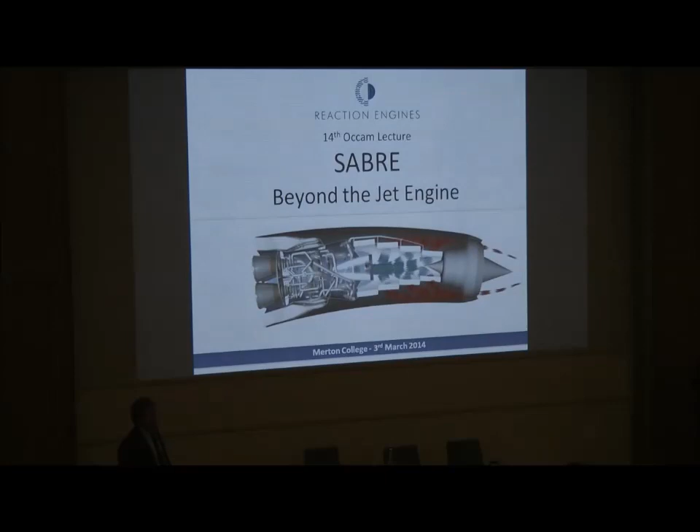One of the things I heard in conversations earlier is that there are a lot of physicists here, so I will pause at some point and talk about entropy. I love to do that because if it's an audience of engineers, they go absolutely pale, and when it's an audience of physicists, they go just a little bit pale.

Looking around this audience, most of you think that access to space is ancient history, but unfortunately it sort of happened mid-career as far as I'm concerned.

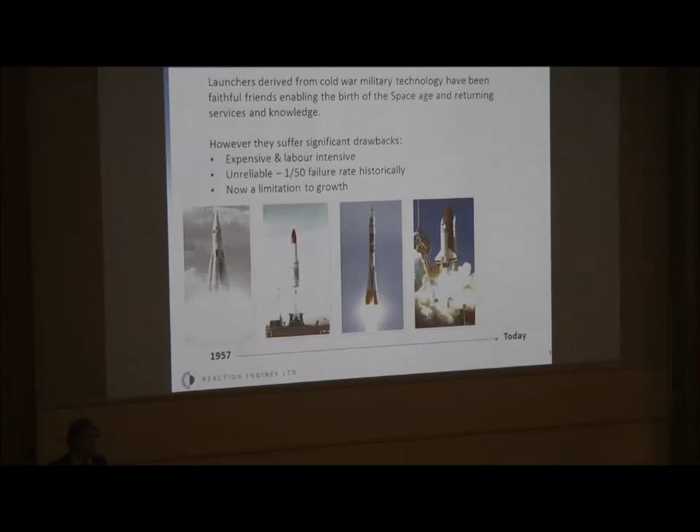The launchers were derived from the sort of Cold War technology that we developed to keep one another at bay, and unfortunately it looks like we still have to do that to some extent.

They've been really faithful friends, and I'll come on to that in a moment with regard to the whole new vista they've opened up in our understanding of the solar system, and the way they've impacted our life on Earth every day. All of you are influenced in ways you probably don't even realise because of access to space.

In many respects, the Russians set the whole thing moving with the launch of Sputnik 1 in 1957. Prior to that, when I was in my teens, we were looking at the Americans for launching something weighing about 18 pounds into orbit. And all of a sudden, in October 1957, the Russians launched something weighing 180 pounds into orbit. Everybody said they must have dropped a decimal place somewhere - it won't be possible. But it was true.

This was originally designed to deliver very large atom bombs onto the West, because the Russians didn't know how to make small atom bombs in those days. But from that, everything has grown.

You can see that that's really the same sort of vehicle that we've got here, with upper stages and so on. This one was Black Arrow, this one was British. We've got a unique record in Britain in that back in 1971, we developed this launch vehicle in the previous decade.

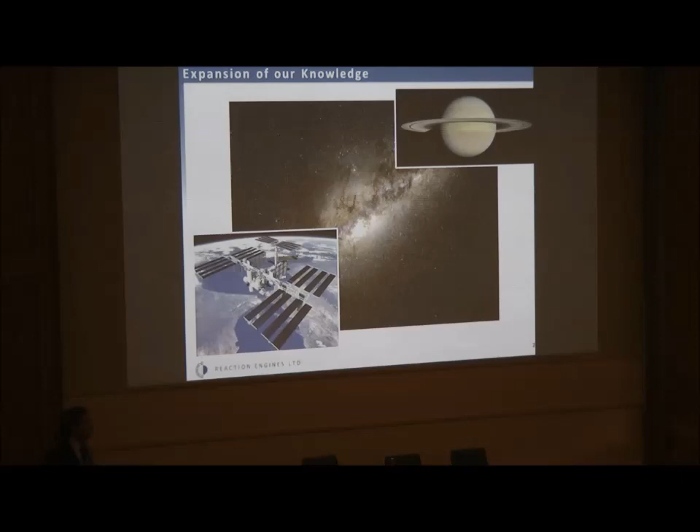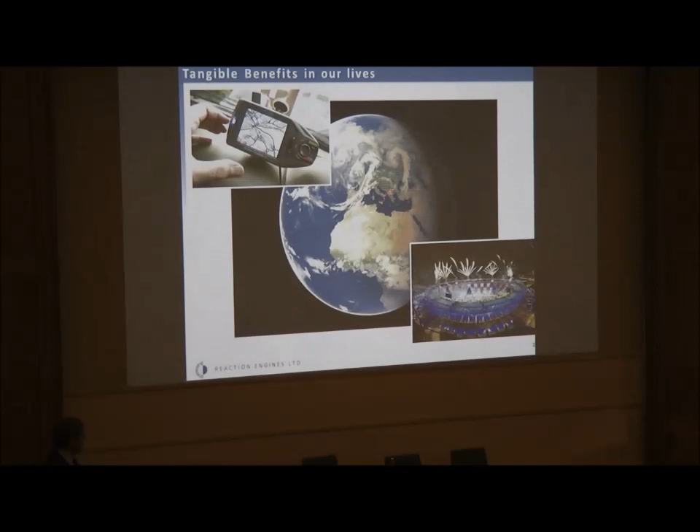And of course, there are other much more tangible benefits in our lives. You can drive into all kinds of rivers and floods with your GPS system, and we can broadcast the Olympic Games all over the world from London. So the world is shrinking, the communities are coming together, and one would hope that sooner or later we'll all learn to realise that this is a really tiny place and that we can't afford to muck about on it the way that we currently do.

The problem with rockets is that they are basically military hardware brought into modern life. A rocket arrives at a launch site as a large airfix kit of parts, which you put together, with a massive number of people. To get a shuttle into the air took about 6,500, at its peak about 10 or 11,000 people, just to put it together and get it into flight. That cost between $500 and $700 million for each launch. With our current Ariane 5, the gem of the European space program, each launch is about $180 million in round numbers.

And of course, that rather limits what you can do in space. As a consequence, there may be 50 launches a year, and maybe in a really, really good year these days, 100 launches a year. At that rate, the diffusion of the human race off the surface that I mentioned is going to be incredibly slow, and we need something better.

Now, in Britain, we've got a rather interesting history. My career began at Rolls-Royce working on Blue Streak. Back in 1969, I was out in Australia looking after a set of engines to go into this vehicle, and witnessed the flight of one of those. I've already said I saw the first flight of Black Arrow. So in the 60s to 70s, I learned quite a lot about rockets.

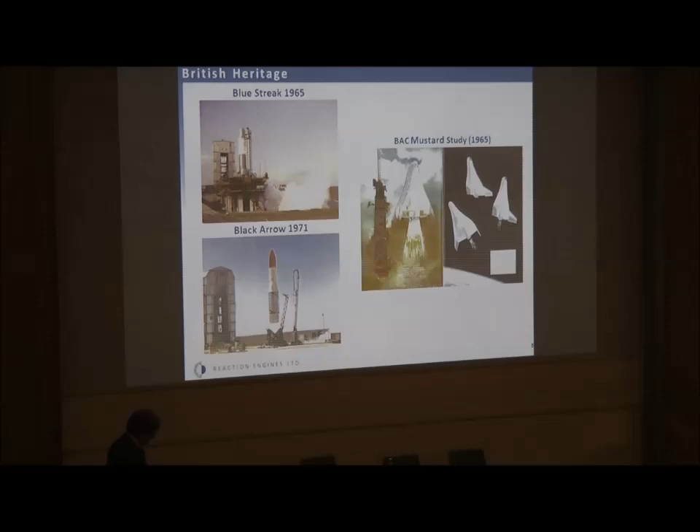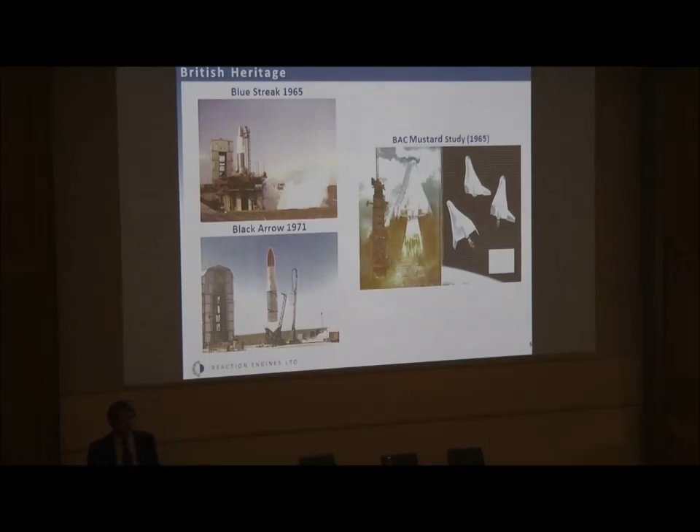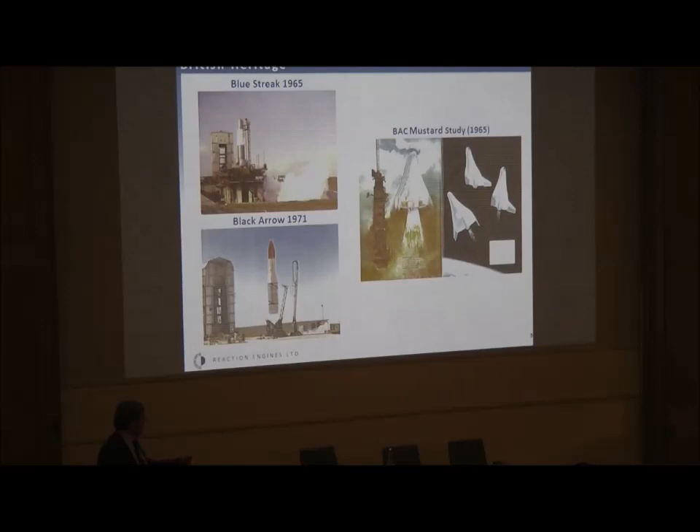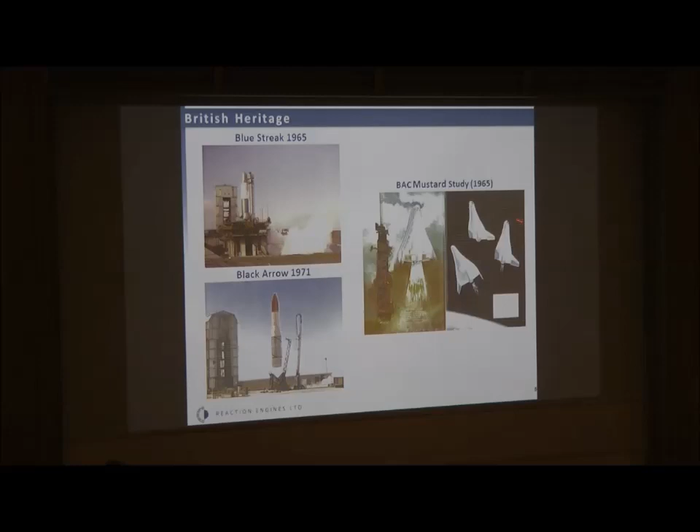But back in the drawing room up at Preston, British Aircraft Corporation was studying something really exciting - a stack of rather similar looking aeroplanes that would lift off as a single unit. At a certain altitude, these would separate, with two stages transferring fuel into the core during the launch, and then this one would go onto orbit, deliver about 5 tons of payload into a low Earth orbit, re-enter, and then fly back. So within a few hours of the launch, you've got 3 separate aeroplanes back at the launch site to put together and do it all again. That would have brought about a major improvement in the way in which we gain access to space - it would have really transformed it.

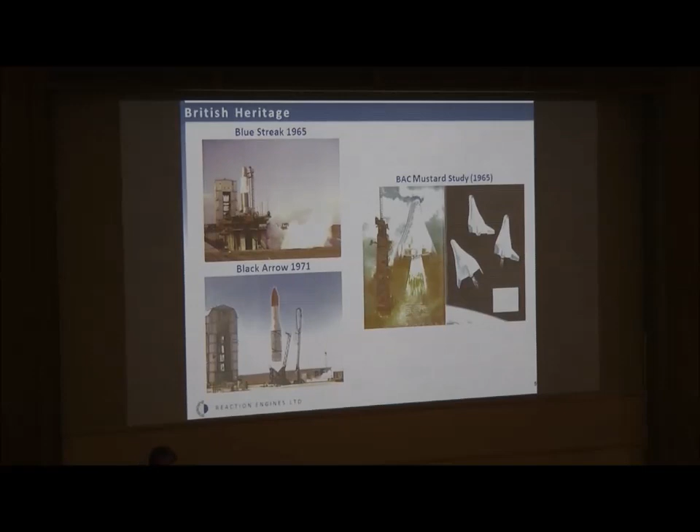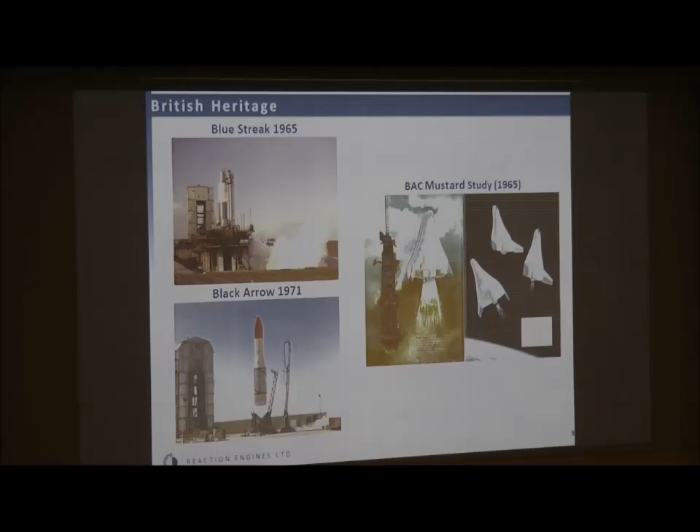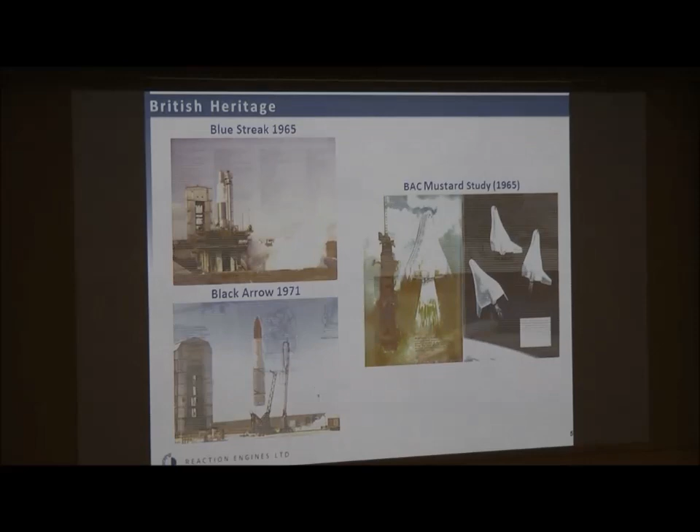But unfortunately, this all arrived at a time when Britain was starting to lose interest in this sort of thing. We'd had the wits scared out of us by World War II, and so in the 1940s and 50s, we put a lot of effort into it. By the 60s, we were starting to face economic realities. Then in the latter part of the 60s, the Wilson government came to power, reviewed all that we were spending on aerospace, and decided that we really couldn't afford to do all that. There's a long story there that I don't have time to go into. But in the 1980s, this came about.

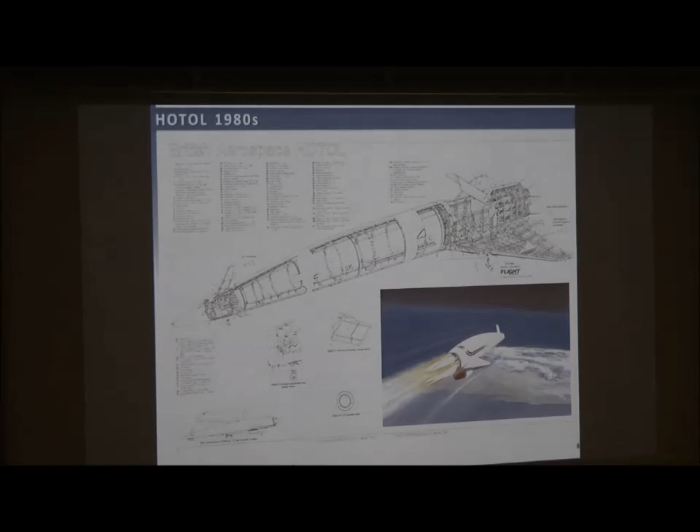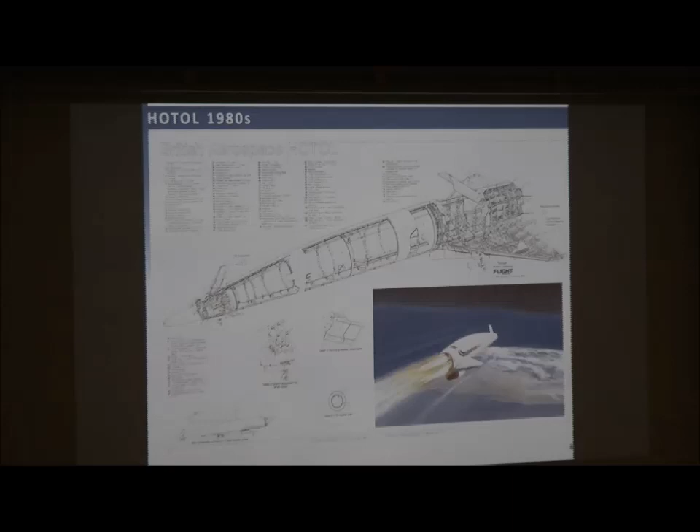Now, Steve mentioned that I spent a few years during the early 70s working for British Aircraft Corporation, working on things that can't go into in much detail, but were very much tied up with national defence. As part of my conditions for working there, I used to have every Friday afternoon with their computer, which had massive capabilities - I think it was an IBM 1160 or something. It had a central processor with 32 kilobytes of core, and we had stacks of card readers and so on.

I was allowed to use that to do whatever I liked on, which was quite an achievement, because the rest of the time I was shut literally behind bars in locked rooms and I couldn't talk about what I was doing. I investigated all kinds of propulsion systems, and all of those studies led me to the conclusion that rockets really were not going to hack it in the long term, and we had to start to do something different.

We had to use the lower atmosphere like a jet aircraft in order to offload the problem of the rocket. Now, a rocket's an exponential device in terms of its weight. When you launch a rocket, the first part of the propellant you burn is putting the energy into the propellant you're going to use later on.

There's a famous equation called Tsiolkovsky's equation. Basically, it's an exponential relationship between the starting weight and the finishing weight of the rocket and the exhaust velocity of the engines. Rockets cannot quite hack it because we can't make the structures light enough. They get very, very close, but they can't quite get there.

So what we want to do is use the atmosphere in some sort of jet engine, air-breathing engine, whatever, to try to help the rocket get over that first little bit.

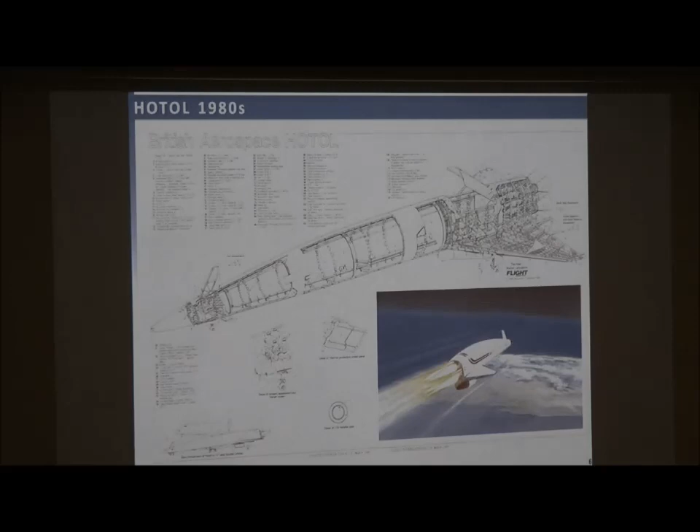So with Skylon, we solved that problem by chopping up the hydrogen tank and distributing it in front of the vehicle and behind, putting the engines on the wings instead of the base, and moving the centre of gravity to somewhere near the middle of the aircraft.

And of course it took on this long pointy shape, and most of you here wouldn't remember the centrepiece sculpture from the Festival of Britain in 1951, which was called the Skylon, hence its name.

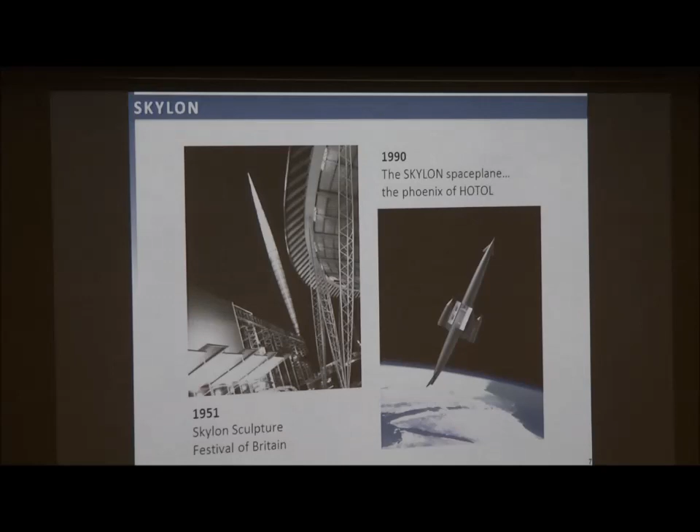Skylon then is a space plane. This is what it's designed to operate like. Payload installed in a hangar, wheeled out, a conventional towing tractor on a runway. The engines start in air-breathing mode and accelerate to a point where it transitions to rocket.

Once it gets into orbit, small engines in the rear of the vehicle actually do the orbit insertion. It can deploy the payload, in this case an upper stage carrying a satellite. It then re-enters, at quite high altitude, but I'll come to this later, and then lands.

So that's just a quick view. We'll come to this in more detail, but that gives you a quick scenario. Once it's landed and turned around, it can do it again. No pilot—it's completely automatic, like any rocket.

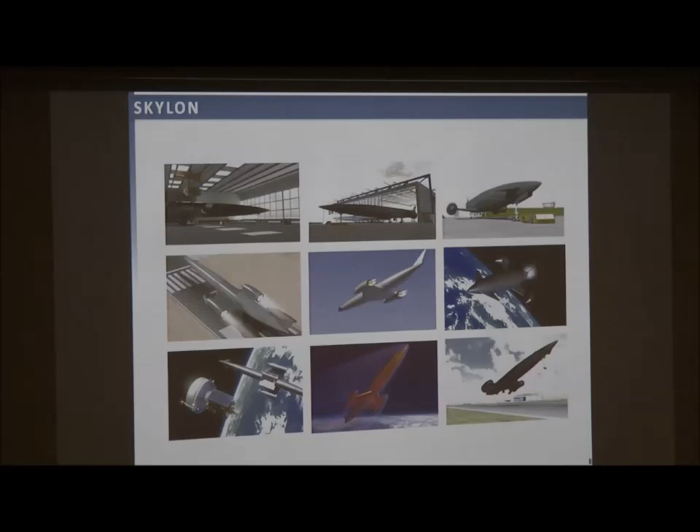There are good reasons for that. It saves weight, saves costs, and also there is no power at landing. It's what we call a dead stick landing, so it's gliding in to do its landing.

What makes all that possible is the Sabre engine. So let's have a quick look at the anatomy of a Sabre engine. It's a combination of rocket engines and a jet engine in effect. Here's the inlet to the jet engine. What enables that to be possible is the following.

An ordinary jet engine is fine until you get to around Mach 2.7, at which point, as you decelerate the air to go into the engine, the kinetic energy gets turned into heat and the air temperature goes up. Therefore the compression work is increasing, and also the temperature is increasing, so you run into the limit of what materials you have to actually pull this trick off.

But the great thing about liquid hydrogen, which is the main fuel I've been talking about, is that first of all it goes into the tanks at around minus 250 degrees centigrade, and secondly it's got 3.5 times the specific heat of water. So as a heat sink, it's a tremendous boon to have on a vehicle.

And we can effectively use the liquid hydrogen to cool the air in this heat exchanger. So the air comes in at 1,000 degrees centigrade here when it's decelerated from Mach 5, passes through this heat exchanger, and in 1/100th of a second the air's down to minus 140 from 1,000 degrees C.

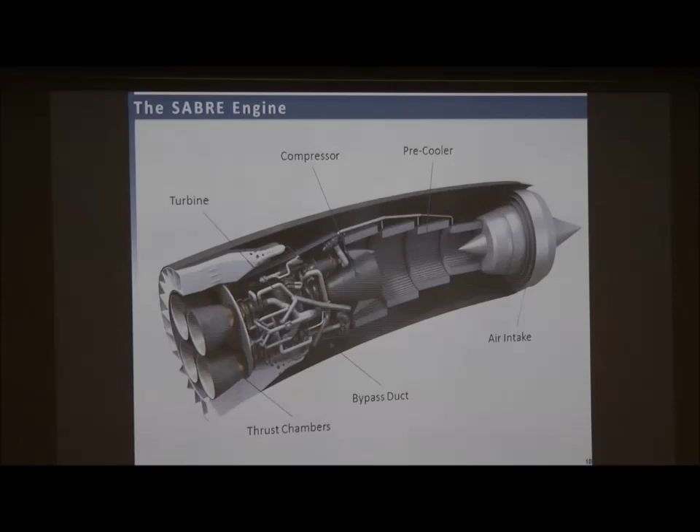So this is the actual engine cycle we're talking about. Here we've got an air intake. The air's coming in at Mach 5, decelerating, getting hot, and we then cool it so it can be compressed and delivered to a combustion chamber and something we call a pre-burner. This is the hot end of a thermodynamic cycle. The fuel, the liquid hydrogen, acts as the cold end of the thermodynamic cycle. The vaporized hydrogen drives these two turbines, and the fuel supply arrives at the combustion chamber, with hot gas going down to the main combustion chamber.

Let me just see if I can backtrack that a little bit so that we can run through it again. Okay, so that's the air cycle again.

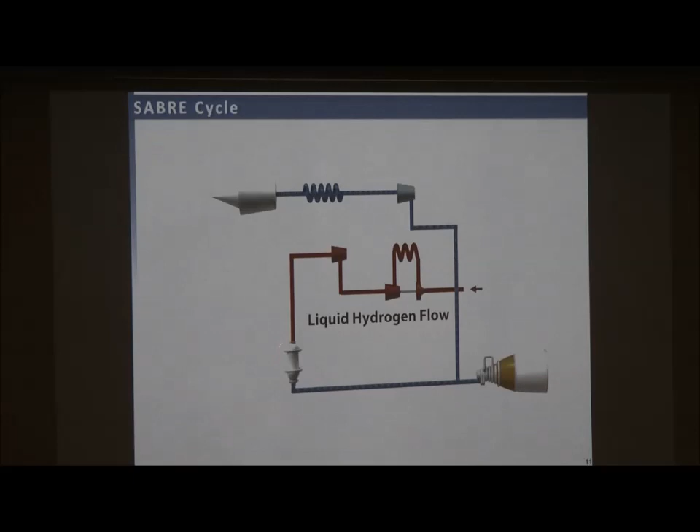And in a moment the hydrogen will come in, so I can just go through that bit again. Here's the hydrogen pump, cold source, a couple of turbines, and that meets up with the air, and hot gas then goes to the combustion chamber.

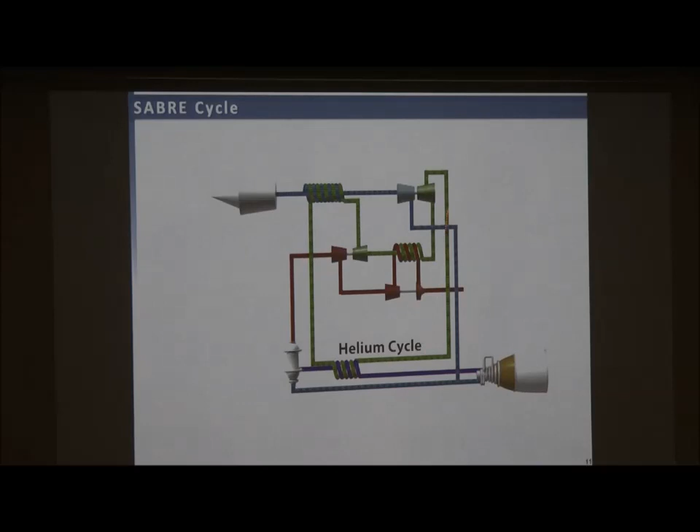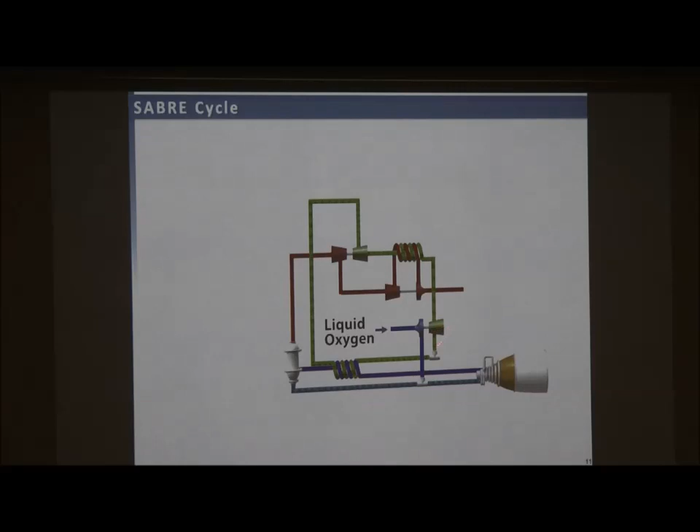Now in between this sink and this source, we put a helium circuit like so. It's heated by the air at Mach 5, we top it up a little bit here, it drives the turbine, we cool it, compress it, and so on. Then when we get to rocket operation, we simply switch it through the turbine that drives a liquid oxygen supply from the vehicle, saving a lot of weight. And then we can completely ascend into orbit.

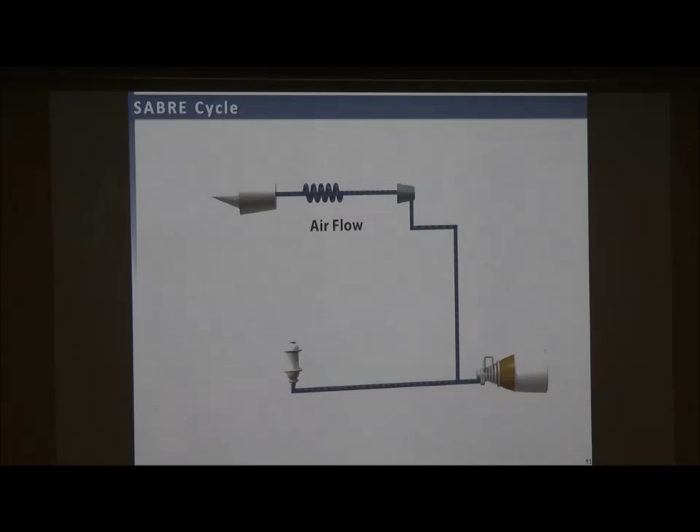Now, this heat exchanger here is actually a phenomenal piece of engineering, and this is what it takes to make one like that. So we start off with a lot of tubes which are about 1 millimetre diameter, and they have a wall thickness when we get them of about 40 microns. Now that's quite thick — the final heat exchanger walls are down to about 20 microns.

And those tubes are going to contain helium at 200 atmospheres. So what we do is assemble a bunch of tubes like that by brazing them into a series of headers and form a modular heat exchanger like this. Here you can see a series of heat exchanger modules about to be made into this structure, and here a particular module about to go into the vacuum brazing furnace to finish up something like this. Each one of those modules is about £100,000 worth of engineering, and in this particular heat exchanger, which is a demonstration, there are about 21 of those modules. So I'm sure you can do the sums on that yourself.

The tubing at the present time costs us about £17 a metre. It's made out of Inconel 718. In a real engine, there are 2,000 kilometres of tubing in each heat exchanger. So this is really impressively expensive engineering, reassuringly expensive indeed.

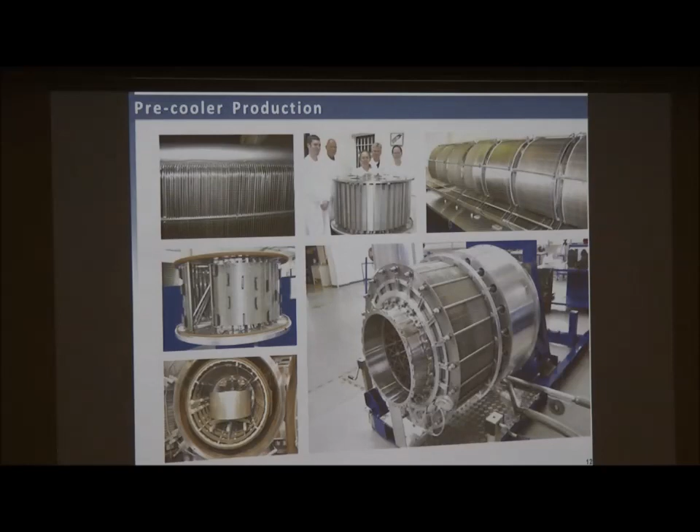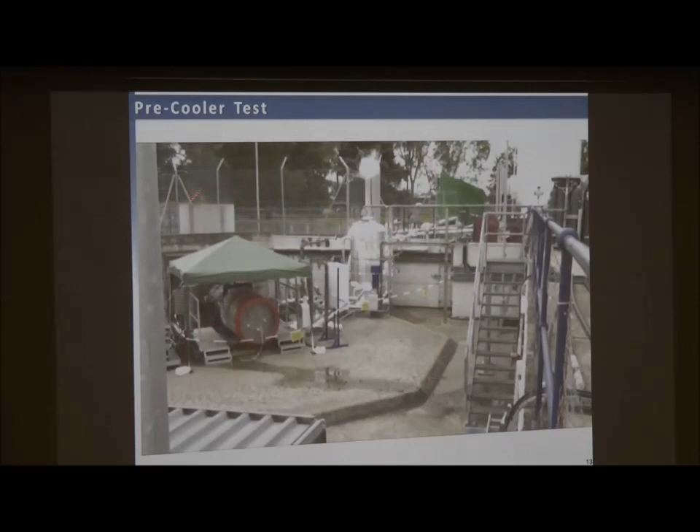We put one of those together and then we managed to get it on test. So what we do on test is that here we have a Viper jet engine and a silencer, in case we disturb Steve Cowley's physicist working on fusion. And here we have a boiler in which we transfer approximately a couple of tons of liquid nitrogen, and that acts as our source of cold. This circulator here circulates high pressure helium out to this experimental heat exchanger and then brings it back. We use the nitrogen to cool it.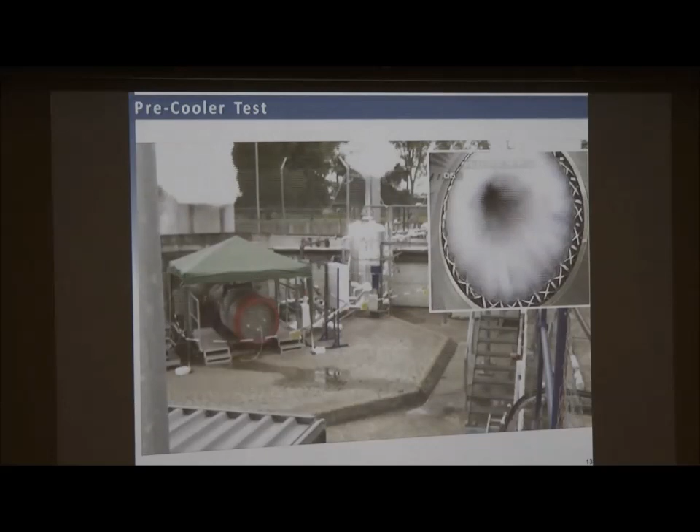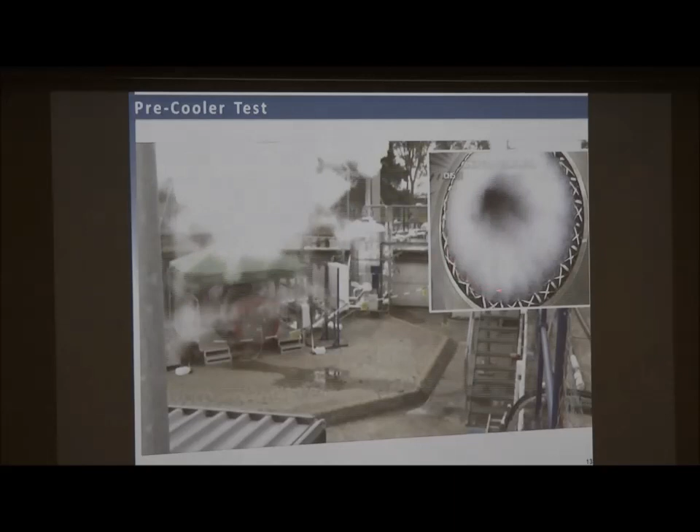And if you look through the cameras in here, this is what you see. What you're seeing there is the very, very cold air at minus 150 degrees C, and it is the heat exchanger sandwiched between two dummy sections, so that ordinary moist air gets drawn in, and you can see the cloud bank that forms when the air with ordinary moisture meets this extremely cold flow.

Now, of course, we have to arrange it so that the very, very cold air doesn't freeze and block up the pre-cooler. If you don't do something about that, it takes about 5 seconds, give or take a second, to block a heat exchanger completely solid. And I'm afraid I can't tell you how we do that. That's one of the sort of secrets that we keep very, very close to our chest. But this is what we've actually managed to achieve.

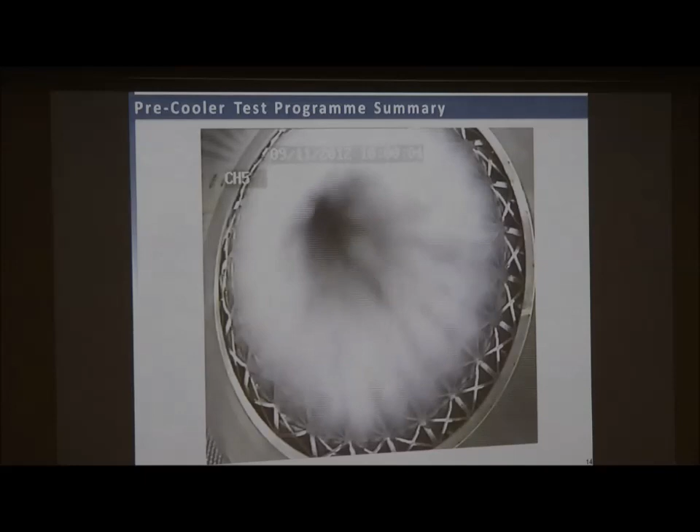So back in 2012, since then we've managed over 600 tests, 300 at cryogenic conditions. Minus 150 degrees C is our lowest. Now, unfortunately, we didn't optimize the frost control system quite right, and so we can only operate with our present system at about minus 120 degrees C in a steady state condition.

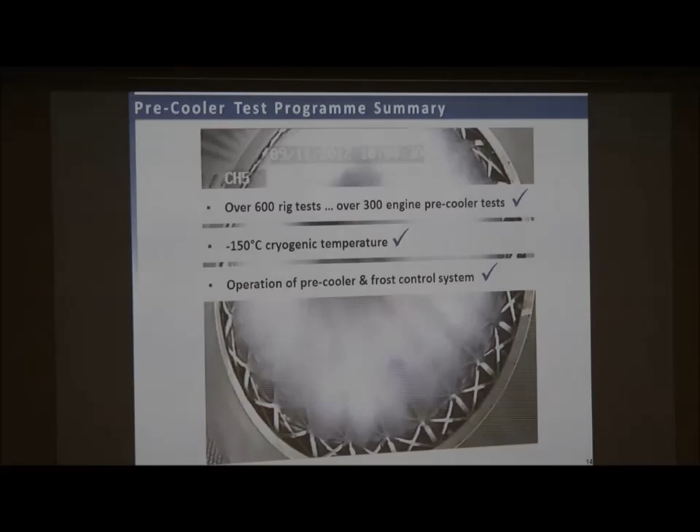We've demonstrated the frost control system, and we've demonstrated the cryogenic cooling. The most important part is that this heat exchanger is flow stable. It wasn't clear that that was going to be the case. Of course, it operates in a fluid dynamic regime, which we call transitional, between turbulent and laminar, whatever that means in a heat exchanger at this time.

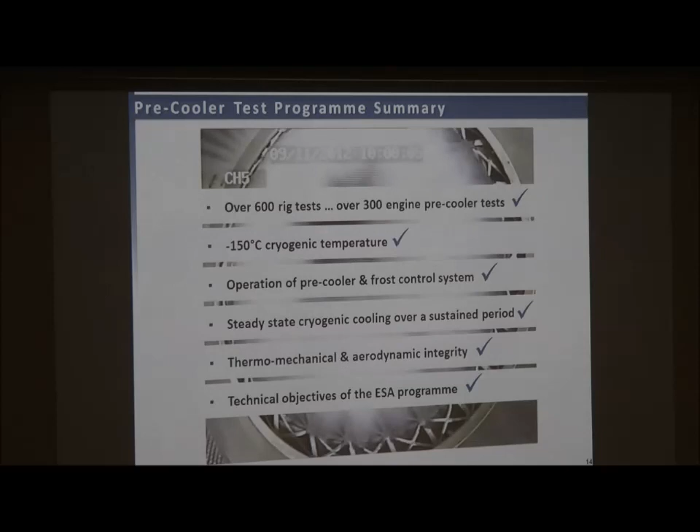And then also we've demonstrated that its thermal and mechanical characteristics are precisely what we need. It's extremely robust, despite the fact it has this extremely thin wall tubing. This has shown that we can take it up and down from our assembly area, and indeed in 2012 we carted the whole thing off to Farnborough and put it on display, much to the chagrin of some of my colleagues. And the most important thing is that this is partly funded by the European Space Agency, and we've met all of the objectives of their programme.

Now, obviously, to bring an engine like this about, there are lots of other technologies. So back in 2008, we demonstrated the properties of a contra-rotating turbine. Heat transfer in the combustion system, a very, very important aspect. We've worked with DLR in Germany and also Astrium in Germany to do that. University of Bristol have done a lot of nozzle work. I'll come back to this one in a little while.

Air intake models we've tested, and conditions of very high pressure in a so-called Ludwig tube configuration, and other types of heat exchangers. We've also done some clever nozzle work, and I'll come to that in a moment, and of course a whole series of heat exchanger stuff, starting back in 1996 at the University of Bristol, when we first demonstrated that we could achieve over 1 gigawatt per cubic metre in terms of heat transfer.

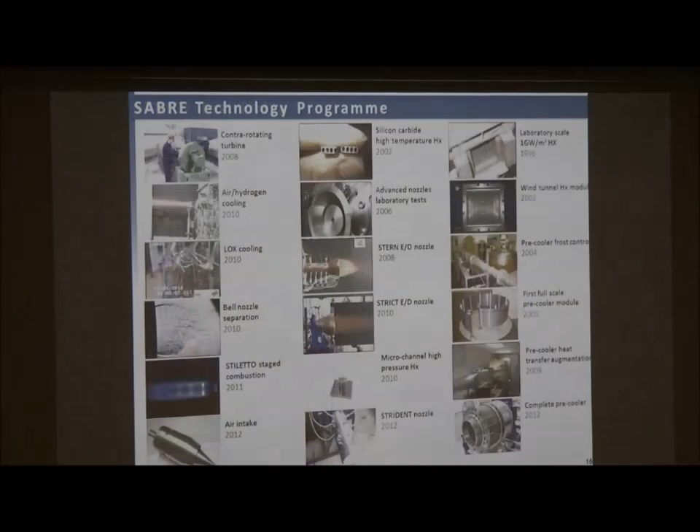Now, one of the problems with a rocket engine that's going to go from sea level to vacuum is that it has to have an area ratio, area of the exit divided by the area of the throat, if it's going to achieve a high exhaust velocity in vacuum. And I've already alluded to the Tsiolkovsky equation, which says that the exhaust velocity of the engine is extremely important. And so we need area ratios of about 120. But the difficulty there is that the flow separates at sea level, and sometimes it can separate unstably. So we did a lot of work with this type of engine, which is known as an expansion deflection nozzle.

So instead of a simple orifice for a throat, this actually has an annulus slot, and the flow comes out as a very thin jet, an annulus stuck to the wall, and operates very stably at sea level. As the engine goes up in altitude, the core of that annulus fills in.

Until at some particular altitude the core is running solid, and the engine is then unaffected further by atmospheric pressure, except that you lose the pressure that's retarding it over the base, so the performance increases like a normal rocket engine from that point forward.

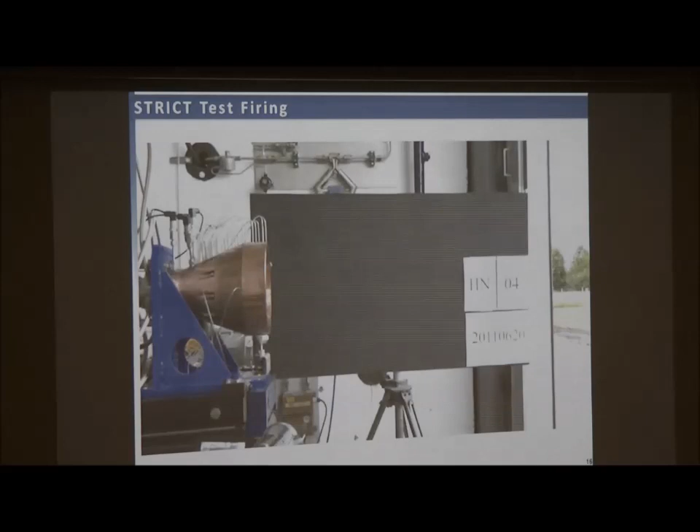Now, there have been a very large number of different Sabre variants, and back in the HOTOL days, there were some conceptual studies. I've already shown you an image of HOTOL, which embodied the Rolls-Royce RB545, a rather primitive version of these cycles. There have been various variants since, and the one I'm telling you about tonight is the Sabre 3 variant, the one we've got out in the public domain.

But what I can tell you is that for the last 3 years we've been working on the Sabre 4 variant of this engine. The main characteristic is that during the air-breathing ascent, we've actually managed to halve the fuel consumption. So the Sabre 4 opens up performance possibilities that even I, at the start of this project, never thought possible. A vehicle could take off from some airfield in Britain, having had its payload installed, fly down to an equatorial site, be filled with liquid hydrogen and liquid oxygen again, and then go off to orbit and do its job. So the capabilities of a Sabre 4 engine are really quite extraordinary.

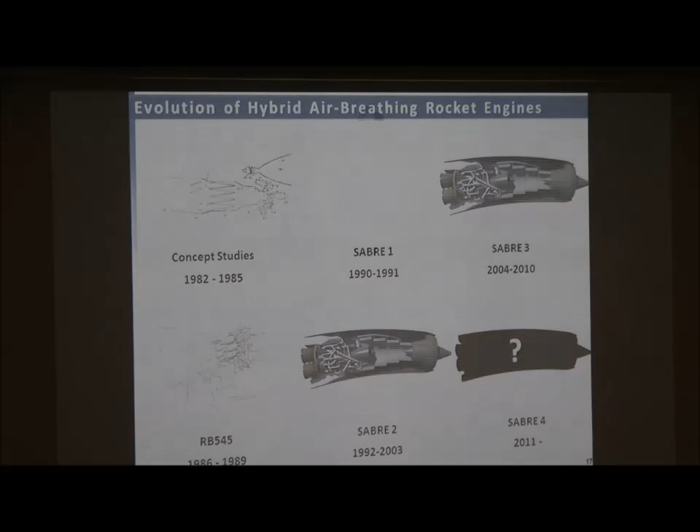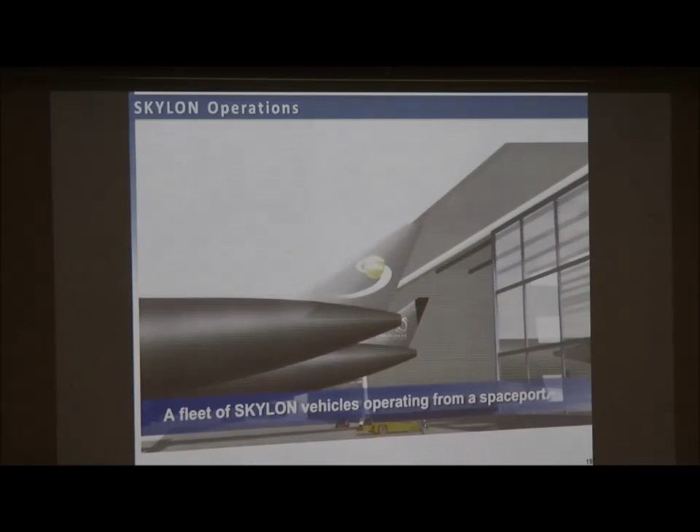I want to say something about Skylon and some of the other possibilities that these engines now enable. Imagine you're somewhere down near the equator, on a launch site there, and there are a whole host of competing operators, Easy Space, Johnson Space, and so on. One of those operators will be in shared facilities.

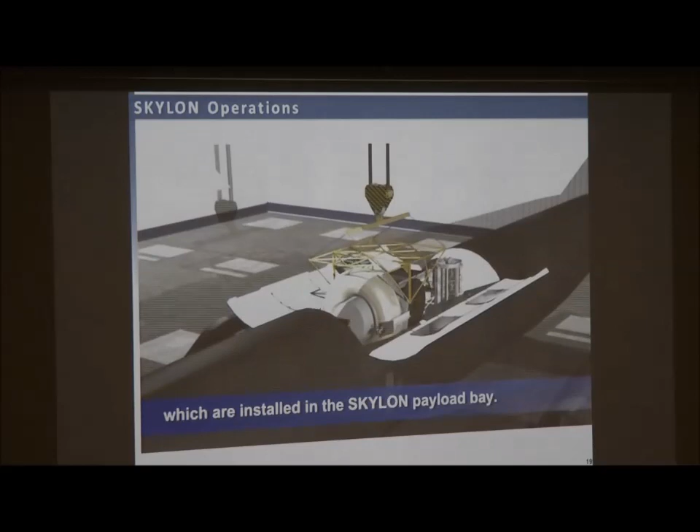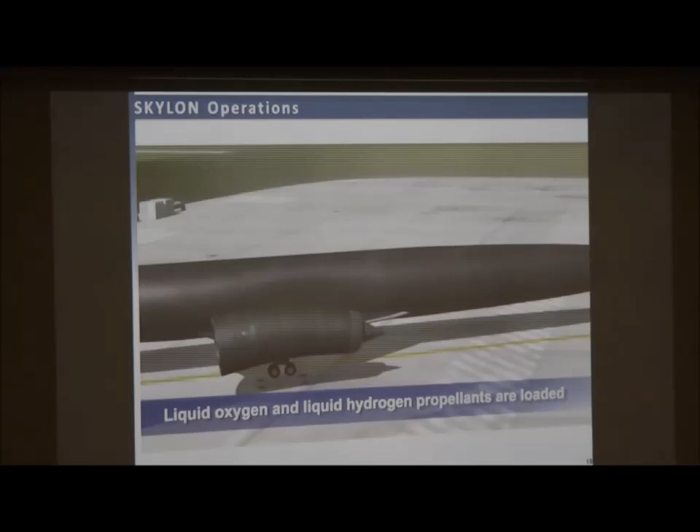The upper stage that you saw earlier, with its payload, is installed into the payload bay, and then the vehicle is taken by its towing tractor out onto the runway. At this point it's empty, and of course there's no pilot, as I've already alluded to. On the head of the runway, automatic systems fill the vehicle with liquid hydrogen, liquid oxygen, helium, and inert all the inner spaces with nitrogen.

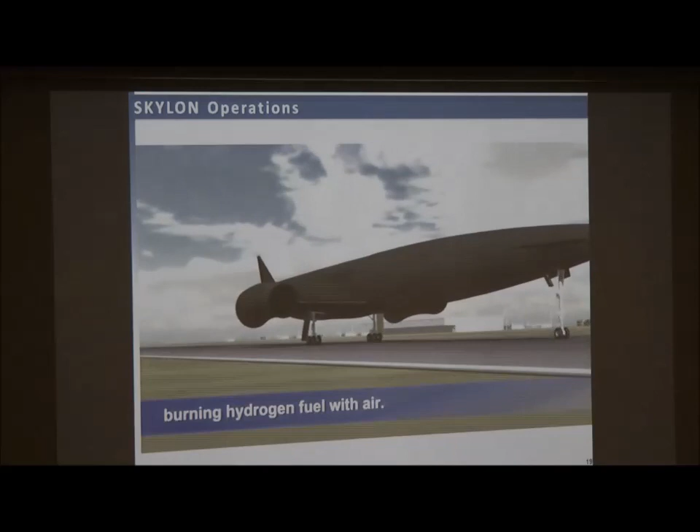And then the vehicle starts up in jet engine mode, effectively, and that accelerates it from the runway up to a speed of about Mach 5 at 26 kilometers. The heat exchangers are operating all the way through this.

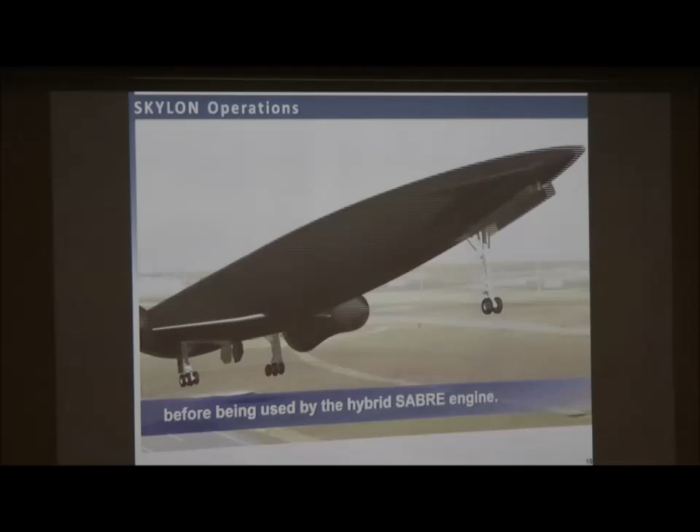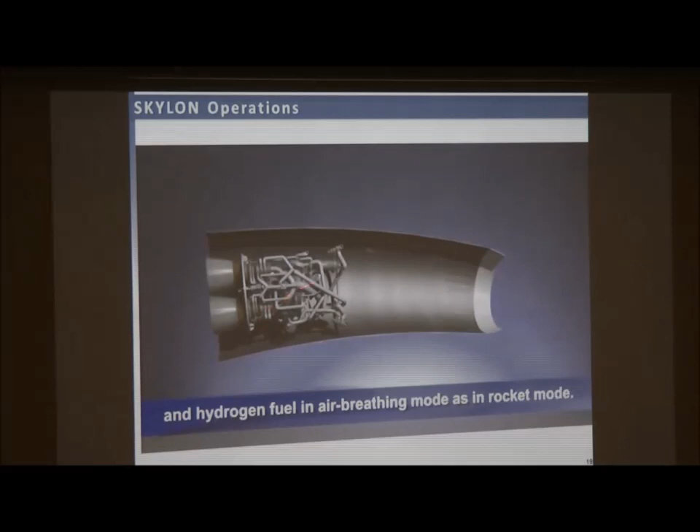So there has to be that pre-burner in there which provides the heat while the incoming air is not hot enough. So just to recap then, it's a collection of rocket engines, combustion systems, the bit that is the compressor for the jet engine, and then this all-important pre-cooler.

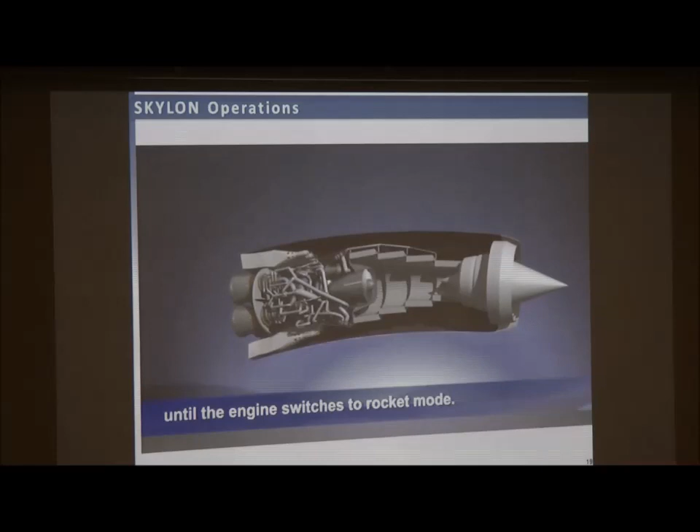That is the key technology that this engine has. There's also a bypass system and bypass burners. I've not got too much time to go into that at the moment. And then the propellant systems, the liquid oxygen, the blue bits, and the liquid hydrogen.

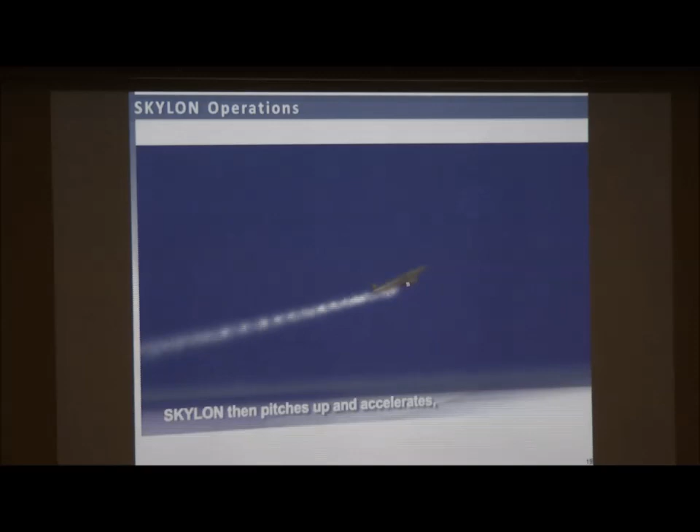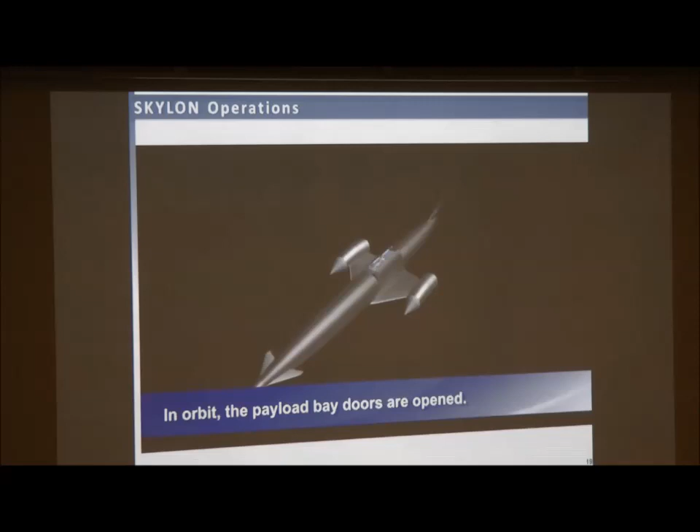So here the vehicle has transitioned to rocket mode, and that pushes it to a transfer orbit, and then you'll see that the orbital maneuvering engines here are circularizing it in orbit. Once you're in orbit, you open the payload bay doors and then magically throw out a space telescope, which I must get somebody to amend this video sometime.

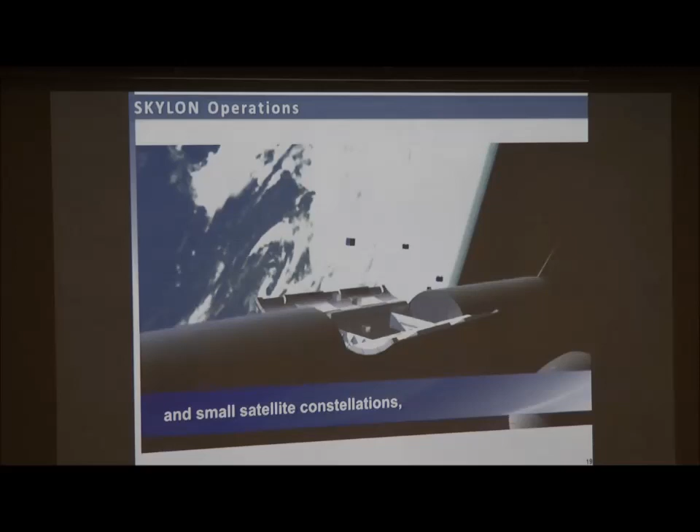But this is intended to show you the range of payloads, including CubeSats, that this vehicle could deploy, with a little bit of artistic license there.

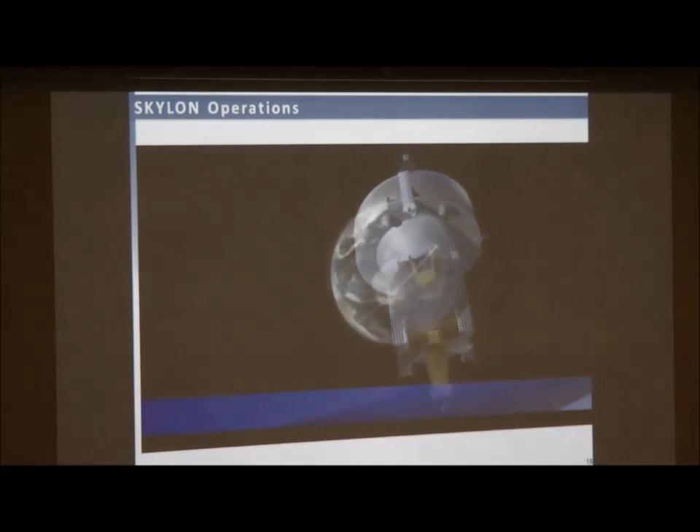So now, magically, we've got the upper stage and the ComSat back. The upper stage then puts the ComSat into its transfer orbit, but the stage doesn't circularize. It deploys the spacecraft and lets it do the circularization burn.

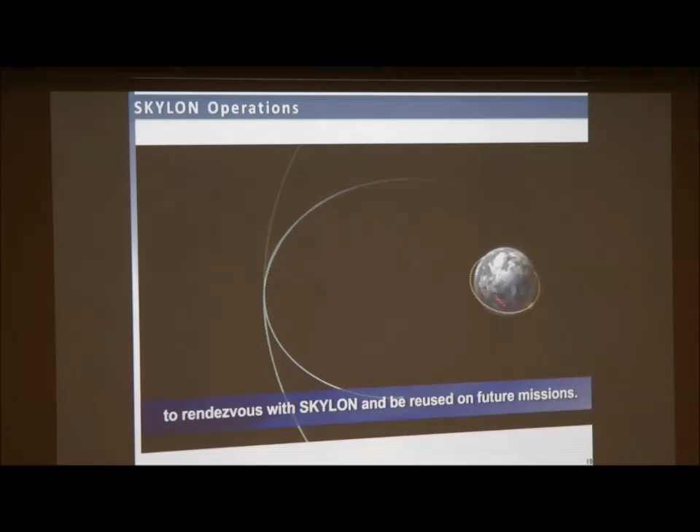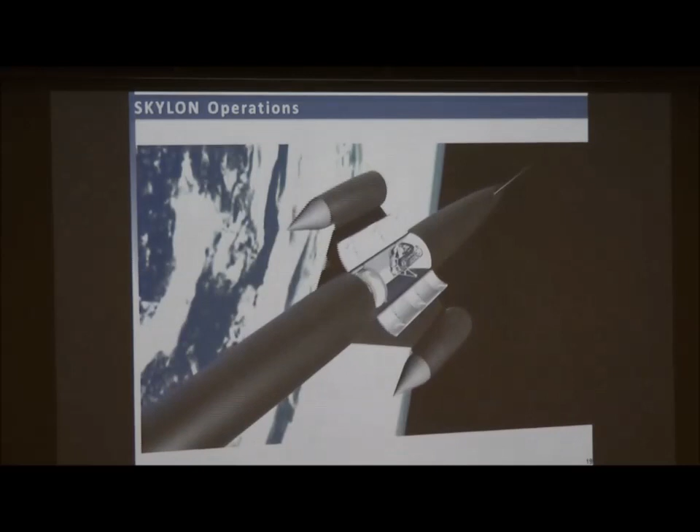And the upper stage therefore remains in an elliptical orbit, which, from a 300-kilometer base orbit, turns out to be in a 7-to-1 resonance. So Skylon orbits 7 times, and if by magic the stage reappears next to Skylon on Skylon's 7th orbit, a gadget captures it, puts it back into the payload bay, and returns the whole thing back to Earth.

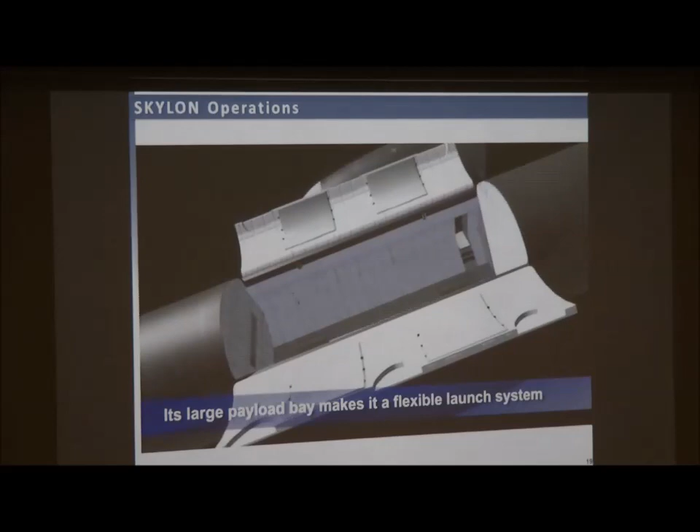So once you've done that, you can return. This is going to show you a little bit more. We chose the payload bay so it could do a lot of things.

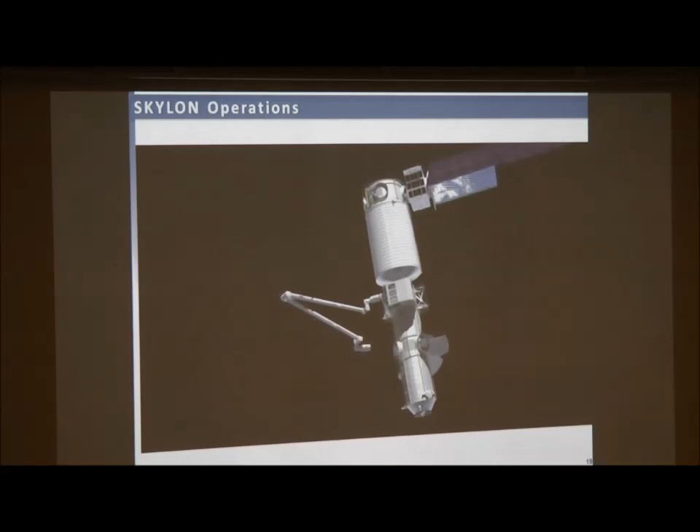This is a passenger logistics module that can carry between 20 and 30 people up to the International Space Station. This would extend the life of the International Space Station, and since it's a $100 billion investment, I think that would be quite important to do.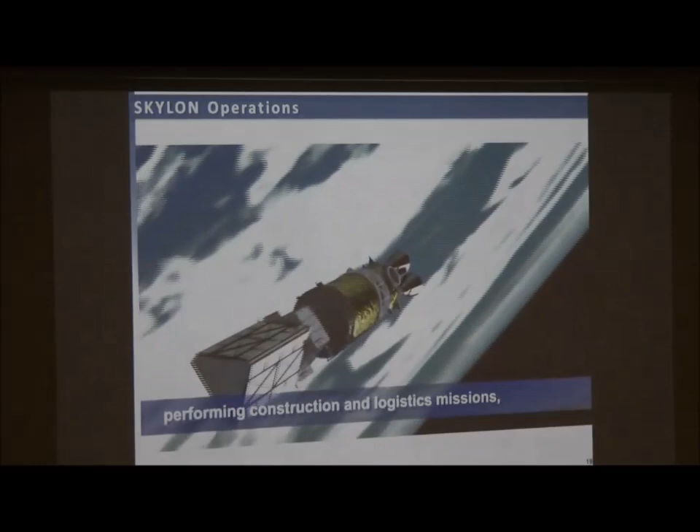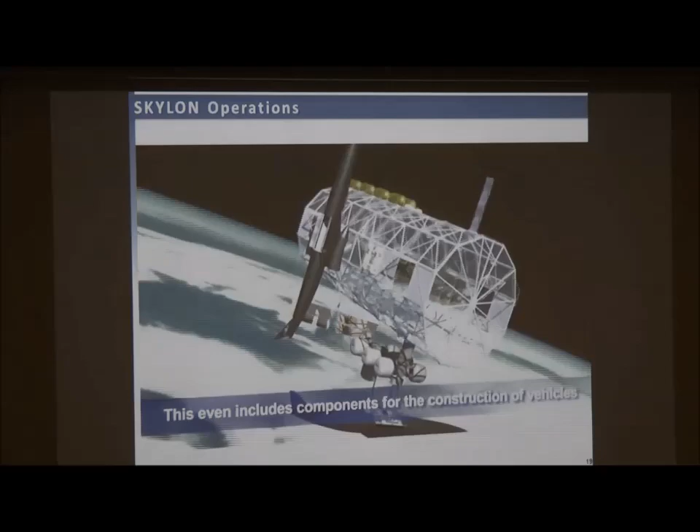We can also set up small laboratories in space and transport nodes. There will be some vehicles which Skylon can carry into orbit, which then stay in orbit forever, and Skylon simply carries the propellants up to them. A stage like this could service 15 tons to geostationary orbit, but also out to the moon, setting up possibilities there. We could even put very large assembly facilities in orbit to build vehicles for reaching out to Mars, and that's one of the most exciting things.

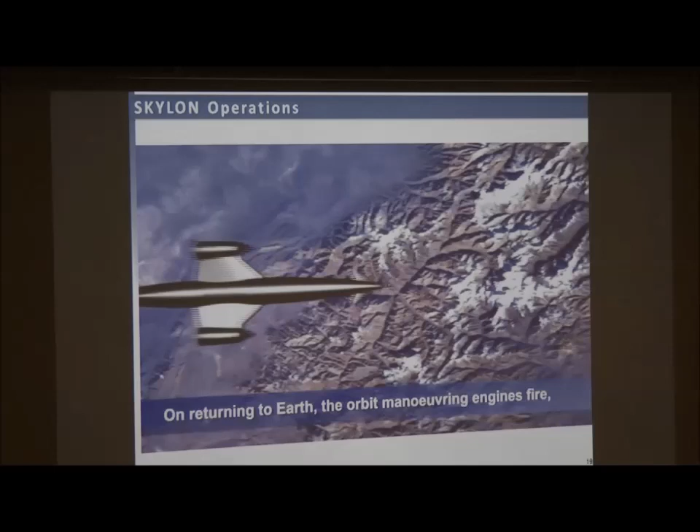We did a very comprehensive study of that called Project Troy, because a young lady named Helen at Reaction Engines sort of suggested we should do it. And there's the re-entry and the landing that I mentioned.

On the vehicle, although we're an engine company, we have done a certain amount of work - trajectory modeling, avionics, and re-entry modeling. Now, any of you who know anything about re-entry vehicles will say that shape will never re-enter, it's all pointy with bits sticking out from behind the bow shock.

The Germans at DLR said this - they said we don't believe that can be re-entered. We've done quite a lot of analysis of that, and we're convinced that it would. But DLR have got one of the best codes going, a thing called TAU, to do that sort of modeling. It usually takes about 3 weeks to do a computation, so we sprang them about 50,000 euros and they went off to model it.

We've also done wind tunnel testing - this is Kingston University. One of the most interesting things that determines this configuration is the fact that you might have to land it in a gliding configuration on a runway with a 30-knot crosswind. So the subsonic testing of this at Kingston was actually quite important.

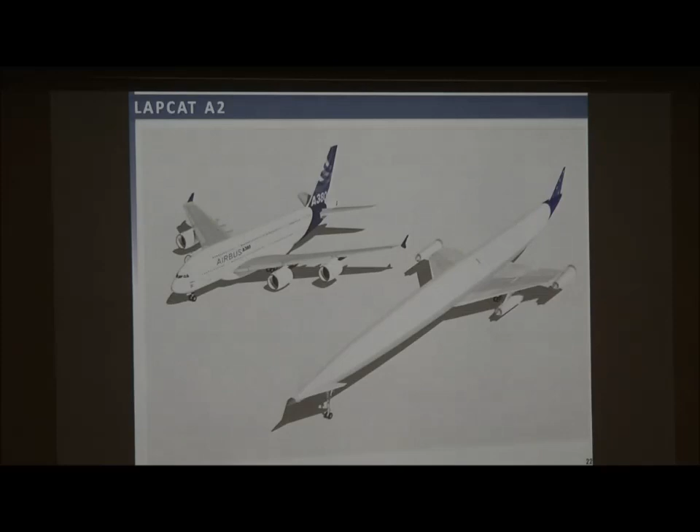But some of this, of course, spins off into other areas. One of the important studies that we did was this vehicle, the A2, which is a passenger-carrying aircraft that can carry 300 passengers from Brussels to Australia in 4 hours and 40 minutes.

So it takes off from Brussels, can fly subsonically out over populated areas, then go out into the North Sea with right hand down a bit, across and through the Bering Strait, down the Pacific. So from start of roll in Brussels to wheels down in Sydney is 4 hours 40 minutes under air traffic control conditions.

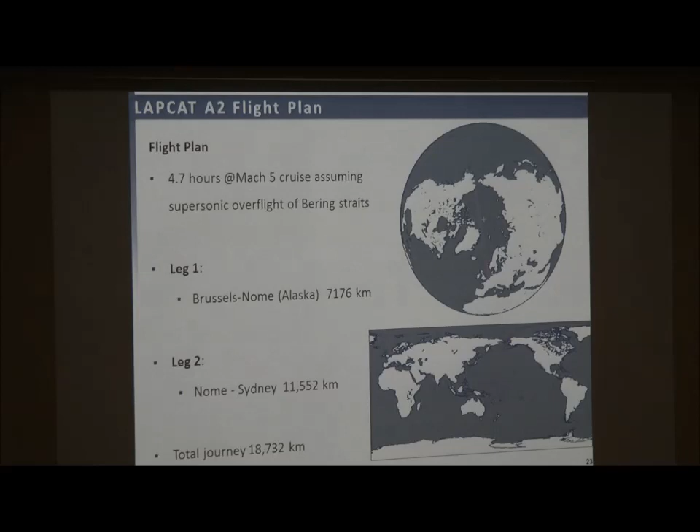And you can turn the aircraft around in an hour or so and then have it back at Brussels before the airport closes in the evening. That's quite an important thing to do because it affects the economics of the whole operation. It's quite likely that about 10% of air traffic would go that way.

And the engine that allows that is this, which we call the Scimitar. It's a development of the Sabre, so you can see it's got a pre-cooler, a compressor and combustion system. However, it doesn't have the rocket feature - it doesn't need to go to orbit. So the optimization of an engine like this is very different.

I told you that on the Sabre, we're up at over 100 atmospheres in the combustion chamber. This has got a combustion chamber pressure of about 8 atmospheres, and that alters the economics of the whole thing. Sabre engines are phenomenally thirsty on hydrogen, but this one is actually quite economic.

We built some heat exchanger modules, quite different to the Sabre ones, to show that it could be done. Now, one of the problems is that the combustion temperature in this chamber is about 2,600 K, and that means the oxygen and the nitrogen react and form nitric oxide. And of course, NOx is very much a no-no.

So we had a job from the European Space Agency of could we actually solve that problem. I mentioned earlier this staged combustion device, and that's it actually on test. What we showed is that we could actually get the NOx produced well below the levels at which it could be detected in the exhaust. And we do that very, very simply: we simultaneously accelerate the flow while the combustion is taking place so that the static temperature of the flow never exceeds 2000 K. That's proved amazingly successful.

The bad news is you lose some of the total pressure in the flow. But it turns out that this vehicle still has complete antipodal range anyway. So this vehicle can not only do 21,000 kilometers at Mach 5, it can actually do 23,000 kilometres in that engine configuration subsonically. So it's got all the go-around and landing capability that Concorde, in fact, never had.

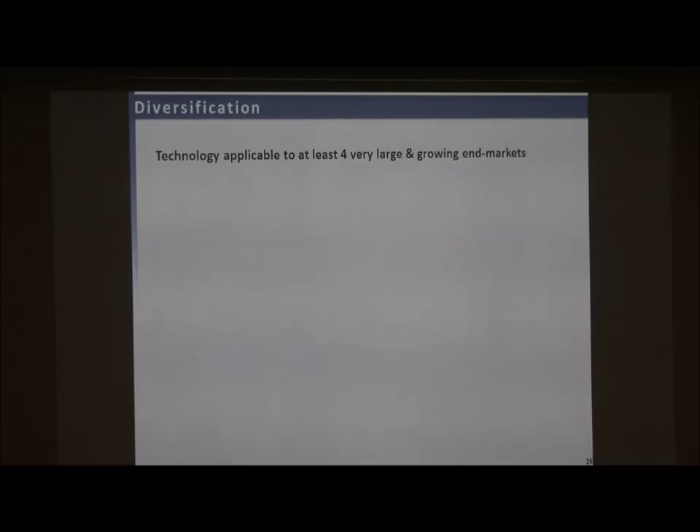So finally, I want to try to take you through some of the other things that we've got. Diversification. When you've got 160 shareholders who've pumped several millions or tens of millions into your project, they're very interested to know how they're going to get their money back. And diversification is something I get bombarded with all the time.

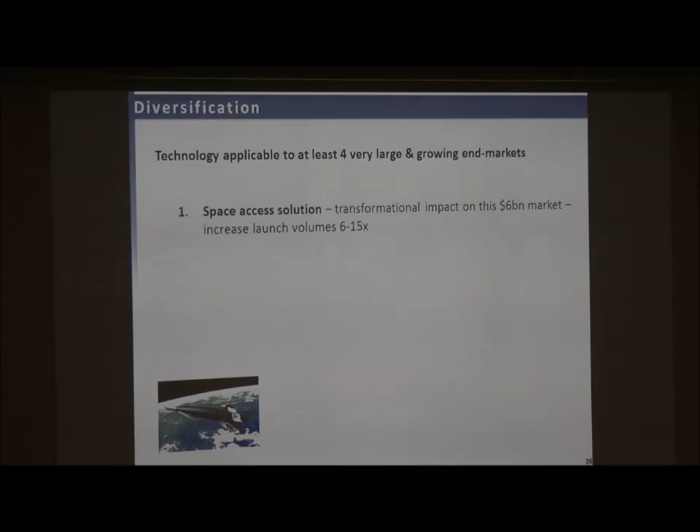Space access, we've talked about. Hypersonic transport, we've talked about. Now, it turns out that these heat exchangers can be used to improve ordinary gas turbines as well. Time precludes me from going into that very far, but one of the most important simple things you can do is cool the air that cools the turbine. At the moment, modern engines are getting such that the air delivery temperature from the high-pressure compressor is such that using it for cooling is getting a bit of a joke.

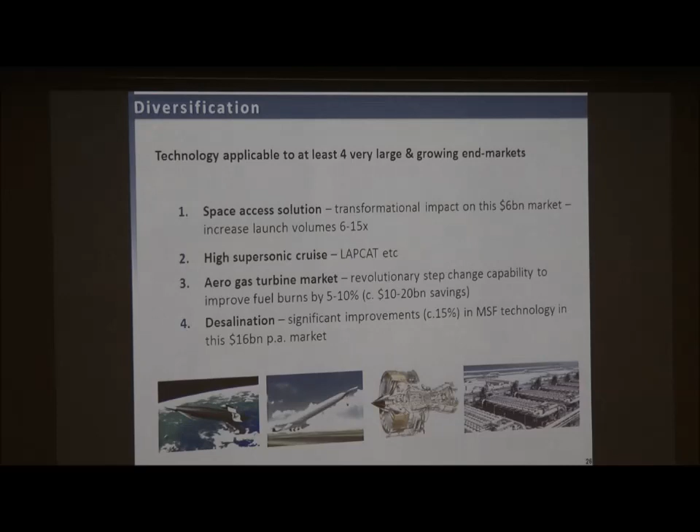So if you put a heat exchanger in, use the external cold air, you can cool that air and improve that a lot. And then finally, a large market is desalination. The use of these heat exchangers makes possible all kinds of ways of making potable water from salt water or from foul water, and that looks like a big market. So we've recently launched an internal diversification program in Reaction Engines to try to capitalise on those things.

Everything was going fine until last July, when George Osborne turned up at Reaction Engines and said the government's going to put 60 million into your future development programme. And of course that completely caused chaos. We've been working on the government for several years, but we didn't expect it to come so quickly. So all of a sudden we find that this is now getting serious, and we're in the process of looking at a 360 million pound, 4-year programme for the next stage of development.

So let me say something about the crew at Reaction Engines. Back in 2000, Reaction Engines was 3 people, and today it's over 60. We've got manufacturing facilities currently in Newbury and Wantage, but also we've had experimental manufacturing facilities in Abingdon, which are now on the site at Culham.

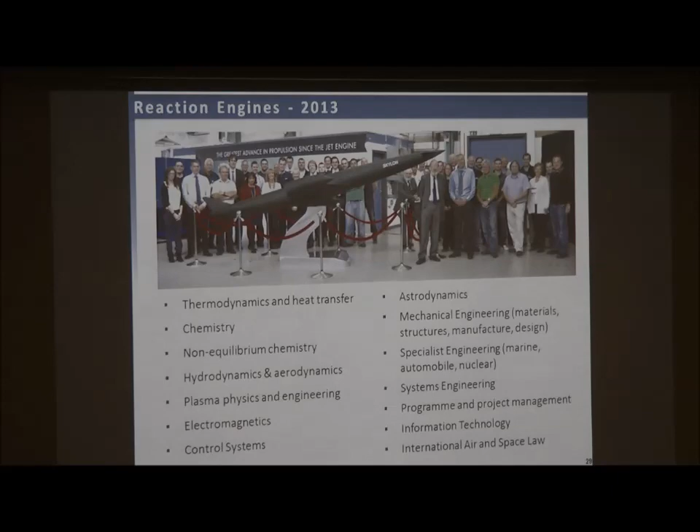As a company, these are all the specialisms that our company actually has. We're very careful on the people that we've brought into the company up until now. So this isn't just one guy who happens to know something about it; a number of these people can address each of these things. So we're a very specialist company and quite highly skilled.

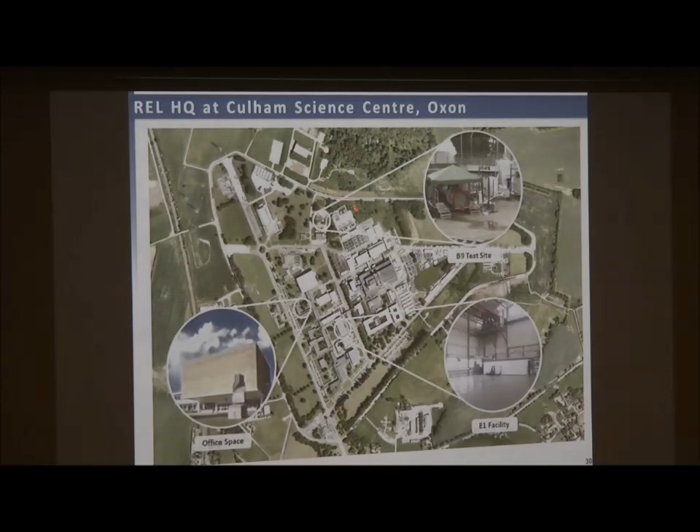We're on the site at Culham, so at the moment we are located in this building here. This photograph actually applies to that building, but don't worry about that. Over the rear here we've got quite a large assembly area, and at the top of the site, the north end of the site, we have our actual test facilities. As you can see, this is a World War II air base, Fleet Air Arm base. And of course, Steve will recognise what's going on over here — these are the JET buildings, and we're right next to the 400 megawatt power supplies that come in to drive JET. But we've also, I've shown you quite a lot of combustion experiments.

We don't do those at Culham. We work with a company called Airborne Engineering, which we're quite proud of. We've managed to help them grow out of the work we're doing. And so here at J site, you'll see that this is also a World War II site where all of the experimental combustion work has taken place so far.

But excitingly, there is an area here called K site, and this facility was put in in the 1950s for test firing Polaris missile engines. Since the 1970s, this has been sitting dormant, and you can see a tree growing out the top of it up there. Somebody couldn't find where to put their old fridge, so obviously carted it in the back of their transit and dumped it in there.

So we are in the process of finding out whether we can bring this site back to life. At the moment I don't know, because over here is Westcott Village, and we're planning to fire an engine with about 120 tons thrust on that site a number of times. So we've obviously got an interesting PR job to do.

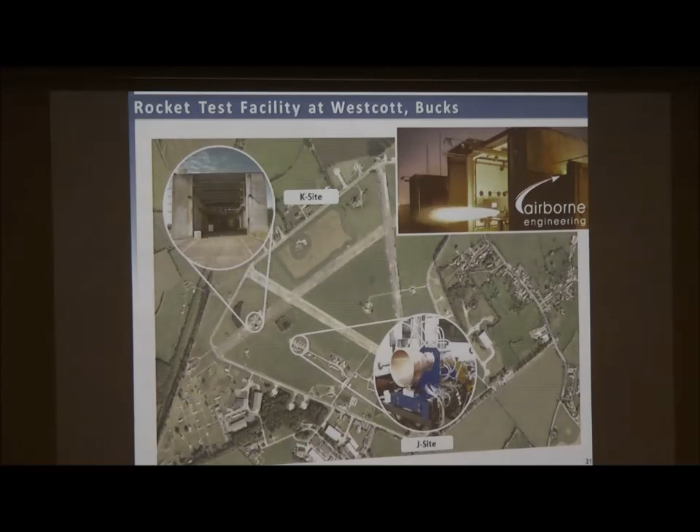Back in the 60s and 70s, when I used to work on this site, with liquid hydrogen and so on, nobody gave a fig about what went on, and the noise was regular. Indeed, we even fired RZ2 on that site, which is a 60-ton thrust engine. All that we had on the main road was a little sign saying beware sudden aircraft noise. That was the way it was back then, but I'm afraid you can't do that anymore.

What's it all going to cost? Well, Skylon is approximately a £10 billion programme, of which £6 billion is the actual vehicle, and £4 billion is roughly the cost of the engine development. Now, the bit that we want to do is this little sliver here, which is about 360 million. This is the programme that we're currently at the end of phase 2, and we've called the next bit, very excitingly, phase 3. That's going to be approximately a 4.5-year programme.

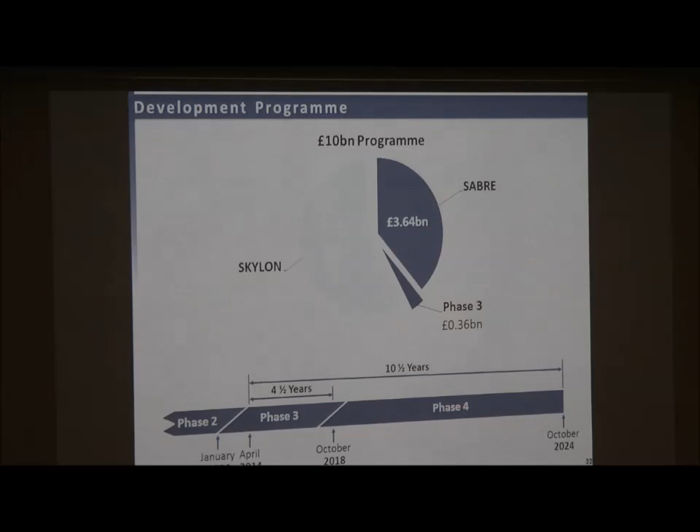We've actually started this ramp up here already. And then coming after this is, well, you could have predicted it, phase 4, which is spending the rest of that chunk of money up there.

Everybody likes to know about this, but it is genuine. We all like to put up PR things, but these are really things: jobs, skills transfer, education. I've already shown you that reaction engines invested heavily. We've got a number of PhDs to our credit, and those apprentices that we got George Osborne to press flesh with. In fact, our apprenticeship scheme is one that we do jointly with the Atomic Energy Authority.

So we're very, very proud of that. We have job training programs, we're engaged in regional growth programs, and one of the things we've got is a supplier base. Obviously, we're a very specialist company, and that reaches out right across Europe at the present time.

So, final slide then, and I think I'm more or less at the end of my talk. How does all this work economically? Well, in the past, the model has been: some friendly government stumps up the money, you develop a launch vehicle, you write off the cost, and then you get somebody to operate that under semi-commercial conditions. Now, those days are going.